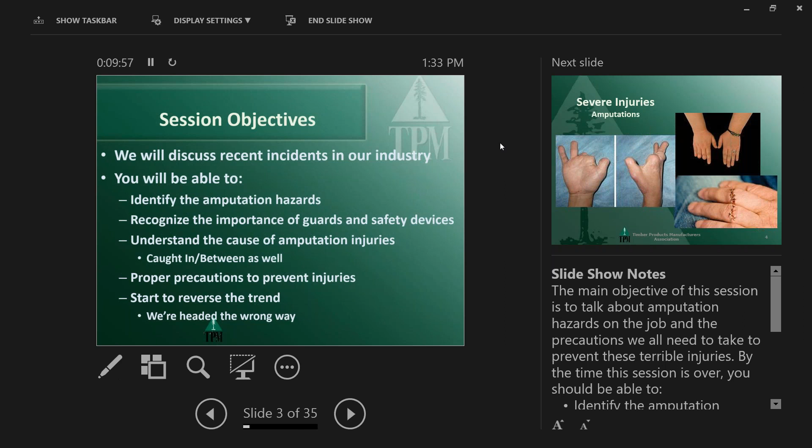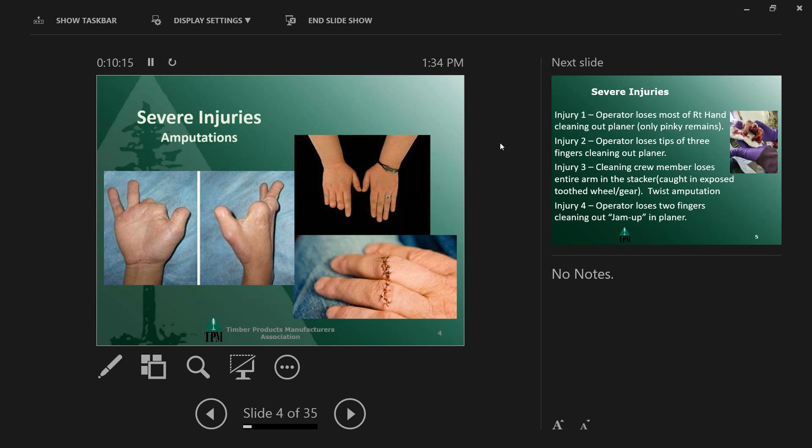We're still seeing quite a few, and in fact, I'm going to have to update this presentation because there are 3 more that I have not investigated yet, so I can't give you any information on those. We're going to focus on amputations. We're not going to cover any broken bones, even though those are serious injuries. We're going to focus on the actual amputations or incidents that have caused basically permanent disability.

The number one, that was the first one we had, a couple of years ago now: they were reaching into a planer. It had been jamming up all day long, or crashed as they called it, and they would leave the planer running. This is kind of a theme with all my planers. They were supposed to clean out the jam with a little piece of lath or a sticker. He got everything cleaned out, saw a little chunk of wood sitting up on the top head of the planer, and reached in to grab it. He'd done it many times, and they ran their planer with the heads unguarded so they could sharpen them while running, which is pretty common.

But just imagine a barrel with a few thousand razor blades on it. It's planing the wood down to the exact dimensions they want, and that thing pulled his right hand in, and the only thing he has left is his pinky. That's it. His hand is just slightly wider than his pinky. Over something that wouldn't have mattered if he'd left it there or not. And that tends to be a theme through all of these. We had another operator lose tips of 3 fingers cleaning out a planer. Another jam up.

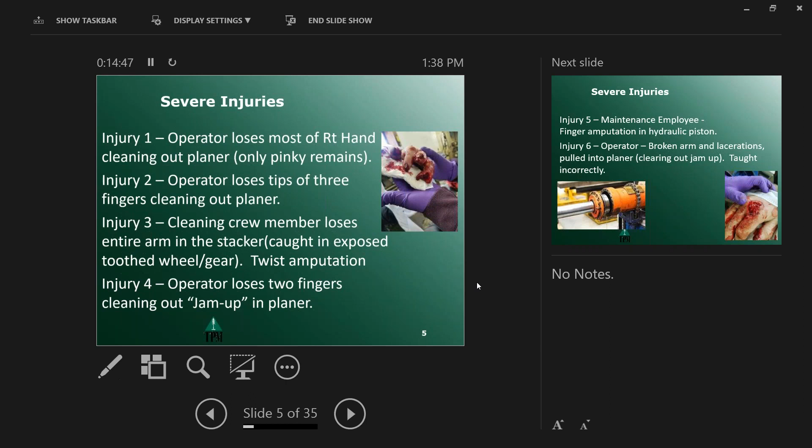Maintenance employee, and they were doing something that I'm a big supporter of: he fixed a machine and he was standing there watching it operate to make sure what he had done had worked. And as he was standing there, he leaned against another machine and the hydraulic ram cycled and it crushed the tip of his finger and took it off.

And then number 6, the employee didn't know the appropriate way to clean out jam ups with this planer, because they had literally taught him to stick his arm in and swipe it out. And they felt that you couldn't get in far enough based upon their measurements. Basically, they had a lot of people who were under 6 foot and you could reach in without hitting the knives. They got an employee over 6 foot. When he reached in, it caught his arm and pulled his arm into the planer. And he ended up losing the tips of multiple fingers and it broke his arm in multiple places.

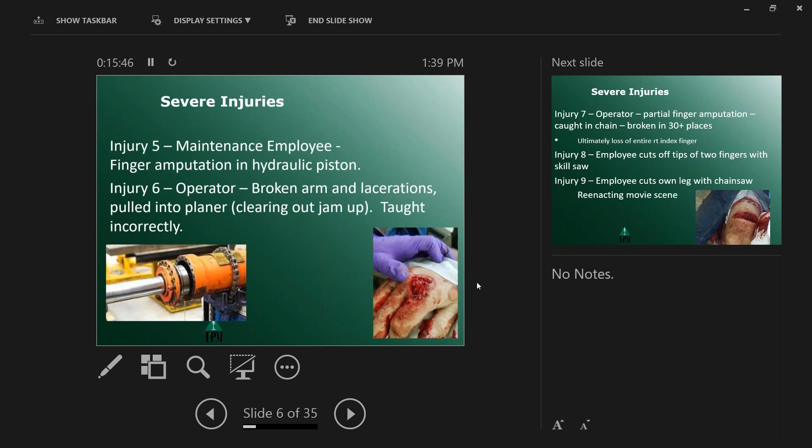Number 7, this one ultimately, so he got his finger caught in a chain, and it broke it in over 30 places. And he refused to have it amputated, is what they wanted to do. Ultimately, the finger just was so badly damaged that a couple weeks later it got necrotic and it had to be amputated.

And then number 8 is there are actually now 4 of these, and we'll talk about 3 of them. Had a run on employees cutting the tips of their index and middle finger of their left hand, cutting those off with a skill saw. So they'll hold a piece of wood in their left hand, and they run the skill saw over it real quick, and they take their fingers as well.

And then 9, not an amputation per se, but this is what happens when employees reenact scenes from Texas Chainsaw Massacre with a chainsaw and run it across the top of his thigh while it was running full speed.

10, we had a couple incidents with molders right in a row. And both of them were pretty bad. In essence, we had unguarded side heads on these molders. And in one, as he was walking by, he tripped and stumbled and ran his hand into the molder. And it just shaved off the top of his hand and then the tips of fingers. And then another one, the employee brushed his hand against it. He was walking by it and lost 2 fingers and parts of his knuckle.

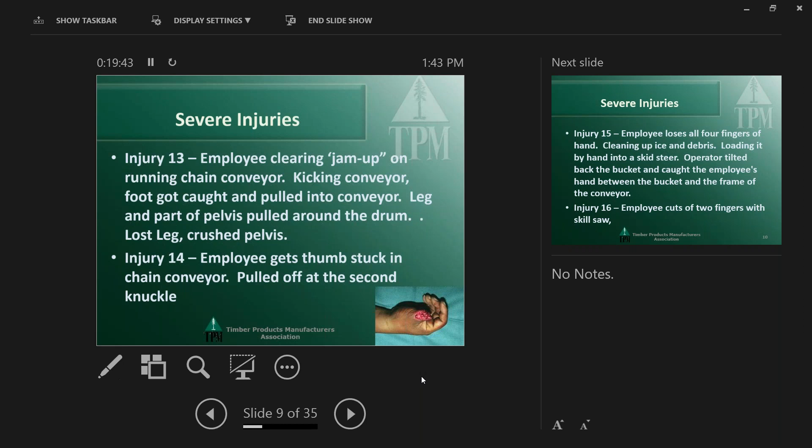We had an employee get his thumb stuck in a chain conveyor, and, for lack of a better term, it just ripped it right off at the second knuckle. We're still watching that one because they've attached some of it back on, but from seeing it just a couple days ago, it's not looking very positive.

Number 15, we had an employee, and this is one of the few, pretty much a brand new employee. Very few of these are new employees, but 2 employees were out there cleaning up chunks of ice and sawdust and bark and everything underneath the conveyor, and they were supposed to be loading it in a skid steer, but they had an attachment they were supposed to be using. They didn't want to take the time to put that attachment on, so they just had the operator driving it, and the other employee was just pushing big chunks of ice into the bucket.

And the employee was getting a particularly large chunk, and he put his hand on the bucket for leverage to try to roll this piece in as the operator tilted it back, and it took all 4 of his fingers off at the knuckle.

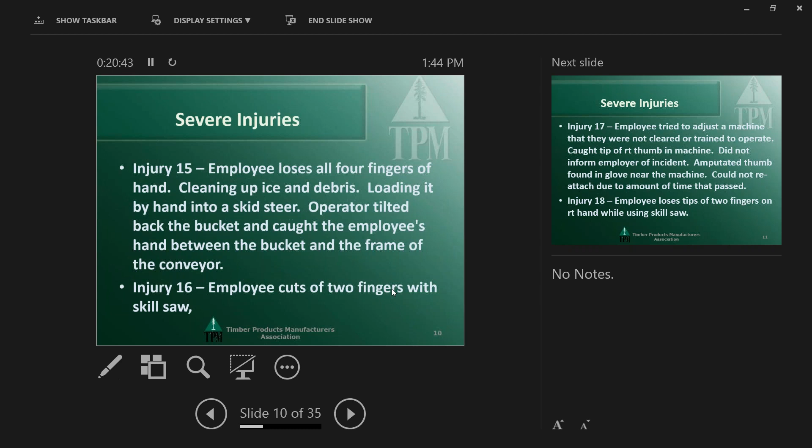Then, as I said before, we have quite a few people cutting off fingers with skill saws. Exact same scenario, holding it with their left hand or just running the saw across it real quick.

17 is, boy, there's a lot to this one. But long story short, we had an employee who was not trained or authorized, and no one had ever asked him or wanted him to operate this stacker. He decided one day to go over and try to either adjust the machine or what was in the machine. They saw him yank his hand away, and then he took off. He just left.

The supervisor went over to see what the heck was going on, found the glove on the floor with the thumb in it. But so much time passed with this in tracking down the employee, because he just left. He just took off. They couldn't reattach that thumb.

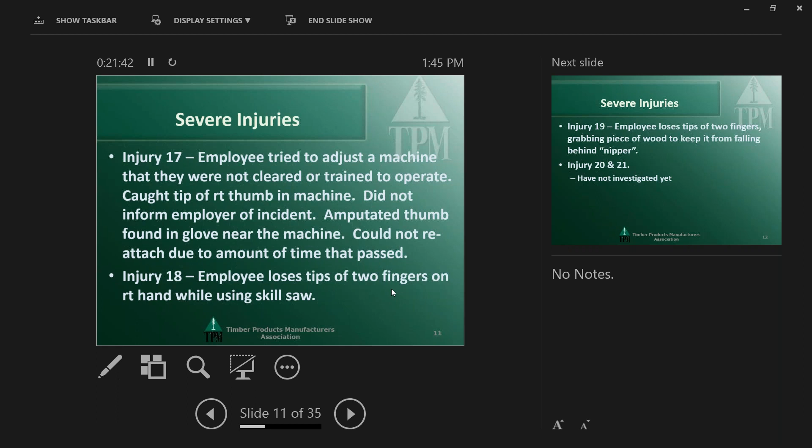And then there's a fourth one. This is the third, but there's a fourth one of another person cutting their fingers up with a skill saw. And there's one more that I've not had a chance to investigate yet.

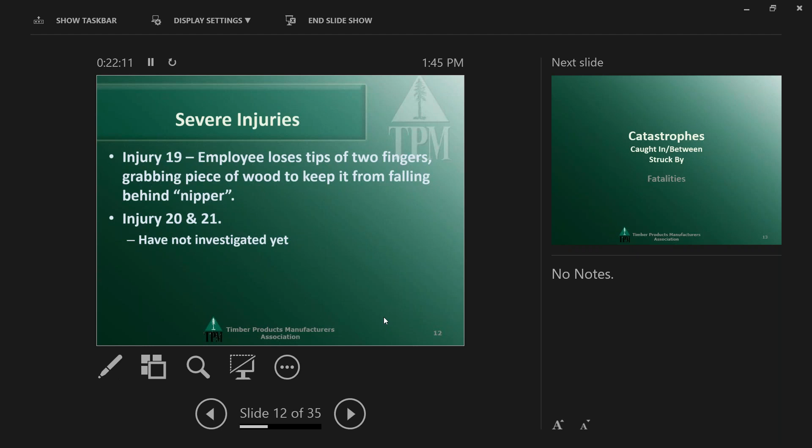And then 19, we had an employee try to grab a piece of wood that had fallen behind what they called the nipper, and it just clipped off the ends of like a shingle, and a piece of wood started to fall behind. He reached to get it, and at the same time triggered the nipper, and it took his fingers off. And so I actually have 2 more that I can't give any information on because I just haven't had a chance to investigate them.

So along that same note, unfortunately, we've had a high number of fatalities over the last couple of years. We had a millwright who was working on a pickup that he had hoisted up in the air by attaching it to the brush guard. He was changing out leaf springs. He got the first set of leaf springs done, and when he was working on the second, he was in between the tire of the truck and the frame when that brush guard broke off and crushed him in between the body of the vehicle and the tire.

And then the picture in the bottom, I guess it's in the middle, that orange and green machine, that is actually the machine. There's an employee working by the end of the stacker, and a board broke, so he went to go get the pieces out, and he waved the operator off. He got the first piece out. She thought he was done, started the machine back up, and as he's grabbing the second piece, his head got crushed in between that orange trolley and the big green frame there in the picture.

This is the day after the incident when we're fabricating a guard to keep this from ever happening again. But yeah, this is a day after our guy died.

We had a machine operator who was crushed by product while he was clearing out a jam up. There's a jam up in the sorter, right around lunchtime. So they basically just paused the line. He went to lunch, came back, and as he was coming up to that sorter, that waterfall, he started flipping boards and clearing it out. And the machine was still in auto mode. And as soon as the eye got clear, the conveyor did what it was supposed to and started loading wood. And he was crushed by product coming down the line.

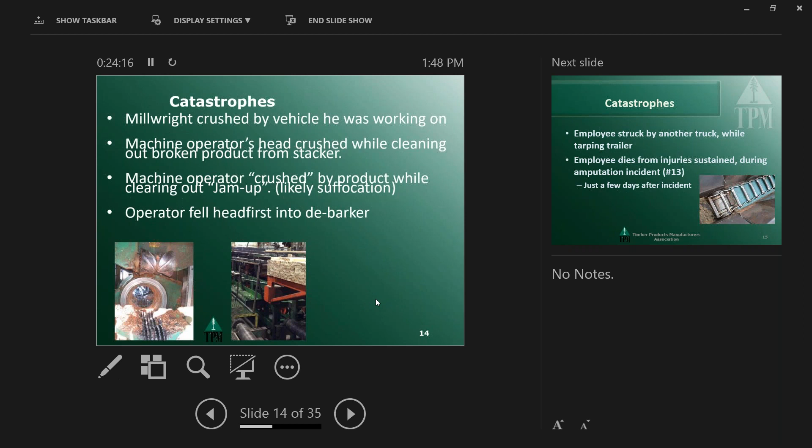And with number 4, I really don't have much information, as it's almost impossible to get it at this point. We had an operator fall headfirst into a debarker. We had an employee struck by another truck while he was tarping a trailer. He either jumped or fell off directly into the path of another truck. And then my employee that lost his leg up into his pelvis ended up dying a couple days later after he'd been pulled around that drum on that chain conveyor.

So there have been other fatalities, but not related to caught in between or lockout, tag out, or amputation prevention, but all of these directly related to that. So I wanted to look at this and start to put things together and try to figure out what in the heck is going on? How do we prevent this?

And the first thing that surprised me is very, very, very few of these are new or newish employees. On average, there's more than 10 years of experience. These are our veteran people that this is happening to, with just a couple exceptions. I'm also concerned about the disproportionate amount of injuries and severe incidents involving planers.

It seems to be, I guess, an industry standard or something where we leave the planer on when we're clearing out jam ups. That worries me. But what really struck me, and it started with my millwright, is that he said he'd actually done it 1,000 times. So I went back and talked to my folks with the amputation, and all of them said in one form or another that exact same thing. I've done it that way 1,000 times.

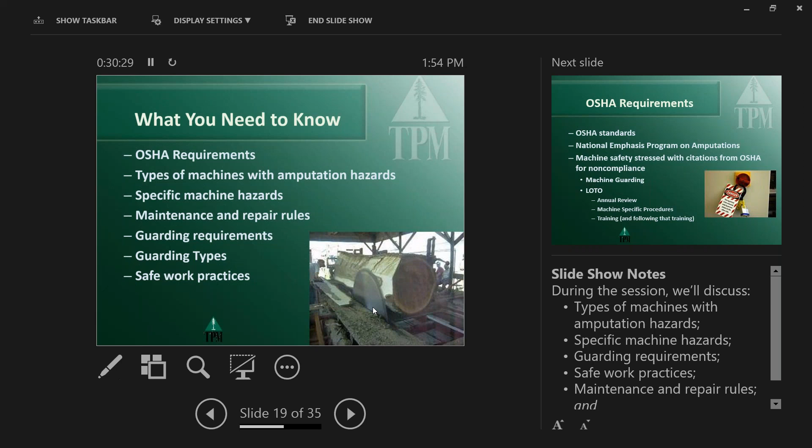And then with the guarding, there's a misconception that it can only be expanded metal guarding, but there are a lot of different options there. We're just trying to keep the employee from coming in contact with the dangerous bits, and it doesn't mean we have to build a metal box around it. And then with all of this, there's going to be safe work practices, and just sticking a stick in the planer to clean out the chunks is not a safe enough work practice.

So, the OSHA standards, we all have those requirements, but I'll tell you, in addition to the lockout tagout and the machine guarding requirements, if you have an amputation, you have the bad thing happen, I guarantee you'll have a visit from either federal or state OSHA, depending on where you're located. It's not a maybe, it's a when. Most of the time it's within 48 hours of the incident.

And they are going to go through you to the nth degree on machine guarding, your program and what's on the machines, and your lockout tagout program. They may go through other things as well, but they're going to go through those with a fine-tooth comb. And if you had an amputation, honestly, who really brought them there? We asked them to come in.

So they're going to look at your training. They're going to look at your machine-specific procedures. Every machine has to have its own procedures. And then they're going to look at, do you conduct your annual review and make sure everybody's still doing it? And you have to do all those things on top of your policy, on top of everything else. You've got to go through and actually make sure people are doing it.

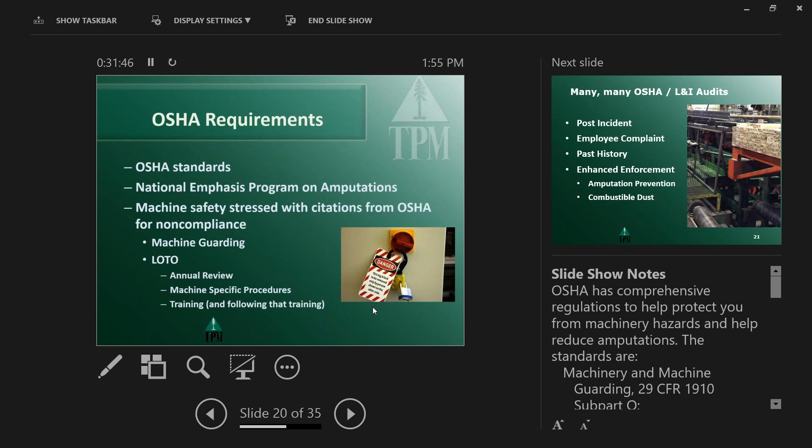And there have been many OSHA and labor and industry audits. The vast majority have been from post-incident. We had an amputation, we had a fatality, we had somebody get hospitalized. There have been a few that have been from employee complaint. And if you get an OSHA visit from an employee complaint, do not waste one millisecond of your time trying to figure out who did it. It doesn't do you any good, and in fact, could get you in even more trouble.

And here's the problem: you have the bad thing happen, be prepared to get other visits every year for the next 3 to 5 years. And then on top of that, there is enhanced enforcement right now on the amputation prevention initiative. So they're trying to prevent those, which needs to be done. And the combustible dust enhanced enforcement is still in play. So it's very, very likely that you're eventually going to have them walk through and take a look at what you've got going on.

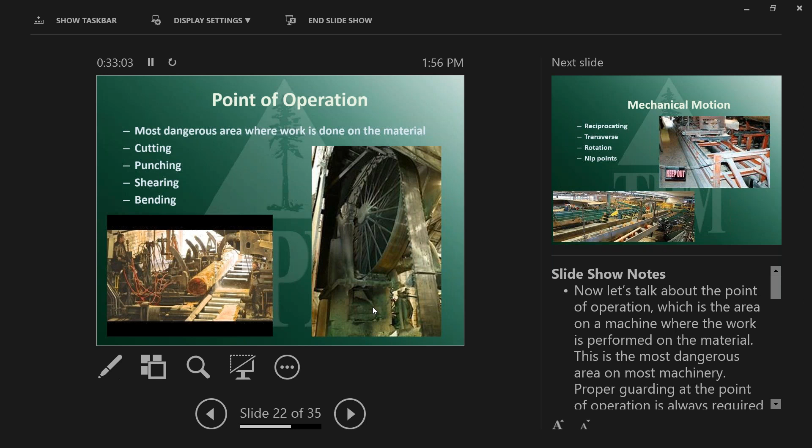So we're pretty good at understanding we've got to protect at the point of operation, where it cuts or the hole drills through or where we're shearing something. We do a pretty good job, in essence, protecting the saw blades. What we don't do the best job on protecting is the conveyors or the mechanisms driving or feeding it. So, like the stacker trolley or carriages or things like that, or we don't look at the belts or the chains that are driving it.

So a lot of times we'll protect the saw blade, if you will, but then we don't protect what's driving it or what's feeding it. So you've got to look at the entire process, and it's not just the point where the work's being done. It's really anything that one of our employees could get caught in or between or under.

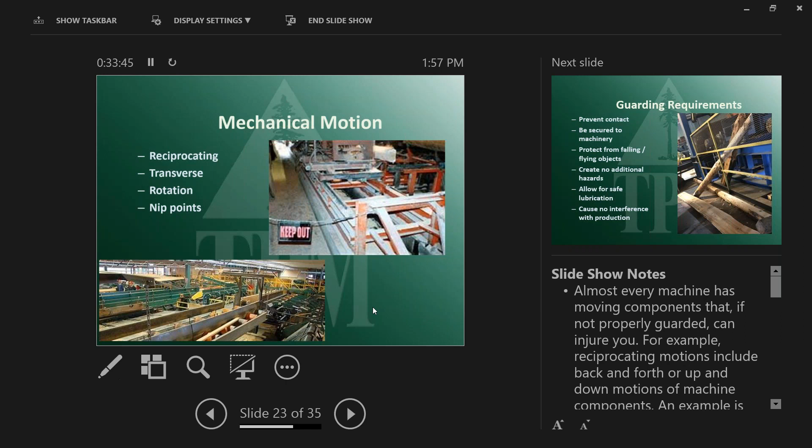So the guarding requirements, and this is coming from the standard, right? The guarding requirements have to prevent contact either between employees and the machines or employees and the product. So we've got to prevent contact. It has to be secured to the machinery. It has to protect employees from falling or flying objects and can create no new additional hazards.

Now it has to allow for safe lubrication and maintenance, and it can't cause interference with production. And that's been the sticking point. That's been some of the argument from companies on this machine guarding. But with this picture, and I see this relatively often, we've got a guard in there, and it's only kind of half doing its job. And so, we've got one in place, but it's not doing exactly what we need it to do, or we have some other issues.

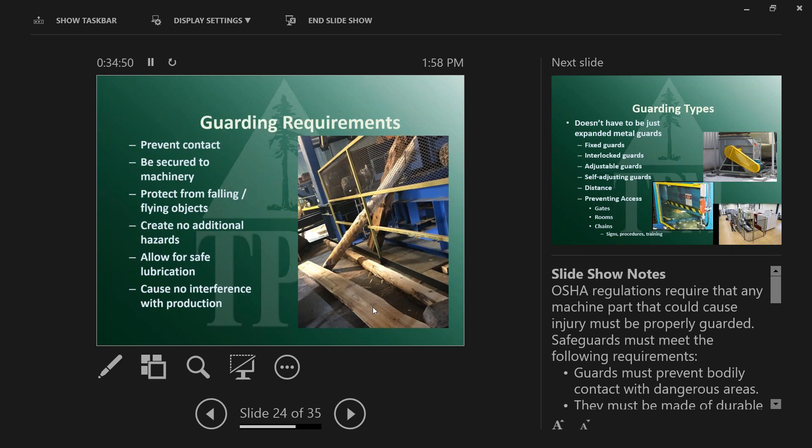And I see that quite a bit. But the guards don't have to just be expanded metal. They really don't. You can have fixed guards, absolutely. You can have interlocked: you take one off and it shuts down whole sections of machine. You can have adjustable ones. You can have ones that are self-adjusting, that you feed a piece of product in and it closes down over it as the product goes through.

But just remember, distance in and of itself is a guard. You can guard by distance. And you'll see that a lot where we try to prevent access. We'll put things in rooms, but putting up chains or railings or gates or bars, that's acceptable. Once again, we just have to prevent the employee from getting in contact with a running machine. And the guards are just part of it, but it's only a part of it.

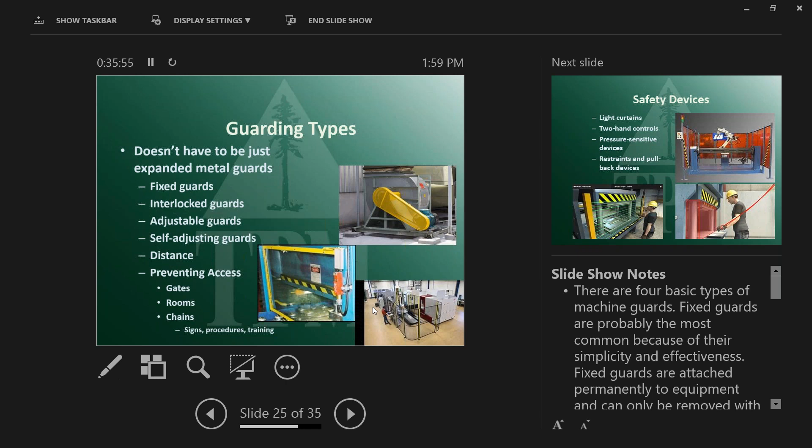Procedurally, we have to be sure that we've got the right way of doing it in place and that people are following it. So it's going to be all of this plus signs and procedures and training and just awareness. And once again, it doesn't have to be those metal guards. It can be light curtains. You can have somebody guarded by distance because it's a two-hand control, and if they leave both those controls, the machine shuts down.

That is guarding. You can have pressure sensitive devices: basically if you walk in and any weight goes on this pad, it shuts everything down. I see that occasionally around palletizing robots, and if anybody crosses the threshold, it just stops. So those robots, unfortunately, can be deadly because they're just there to do their job. They don't care if somebody's in the way or not.

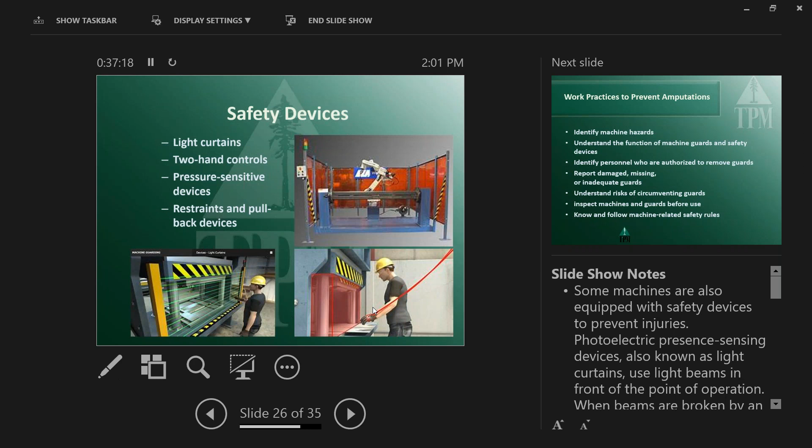And this is relatively common, guarding can be that we just have somebody restrained in place. They're on a body positioning system and they literally cannot get close enough. If you do those, you've got to really be conscientious about how it's maintained and how it's followed, and that it fits everybody. I see that at a number of my mills where the person is positioned in place and they can't fall, and that's fine. Just make sure that is in good condition, because if that fails, you're going to lose an employee.

So just go through your best work practices. How do we prevent this? Go through, look at your machines, identify where you've got hazards, and understand the function of those guards and those safety devices. Why are they there? What are they preventing? My recommendation would be that you have a small group of personnel who are authorized to even remove those, your maintenance guys or your millwrights, your mechanics, but everybody knows that they need to report damaged, missing or inadequate guards.

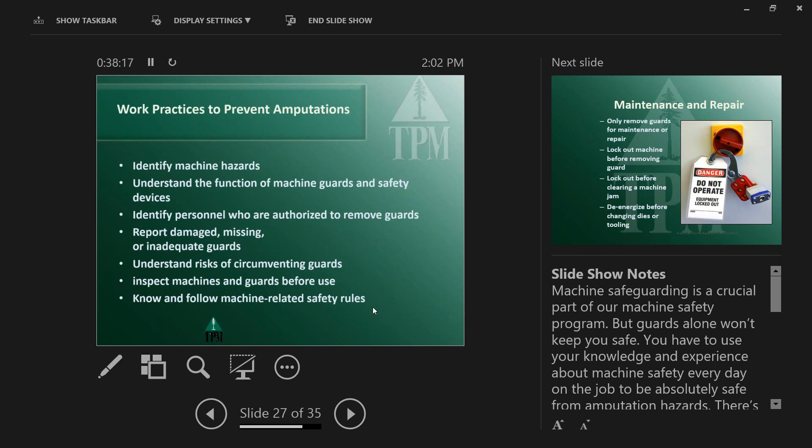Train your people and your managers on the risks of circumventing those guards, and then have operators inspecting those machines before they use it. Because an employee can't follow a safety rule if they've never been trained on it. And with a couple of these, that has been part of the issue: they had no idea how to do it the right way.

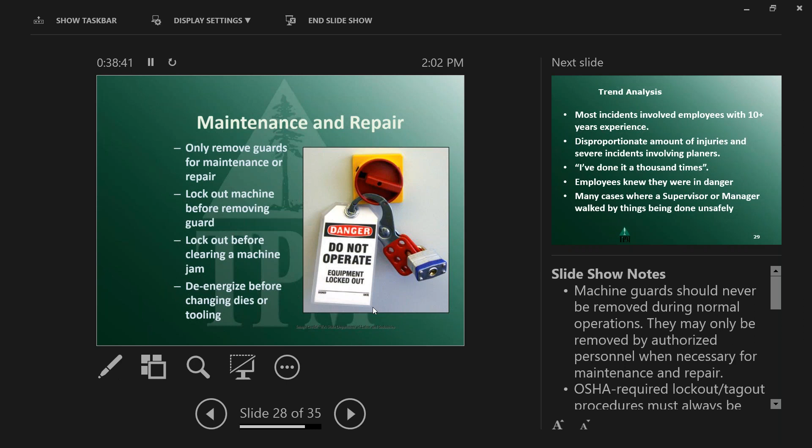And this is pretty standard stuff, but you should only be removing guards for maintenance or repair. The minute you decide one of those guards has to come off, the thing should be locked out before you remove it. I'm a big believer that we need to lock out machines when we're cleaning out jam ups, and de-energize it before you're changing your dies or tools. This is pretty basic maintenance lock and tag out.

And so I want to go back again to this trend analysis, because this, I think, tells us a lot. It's our veteran employees that this is happening to, by and large, with very few exceptions. It's our veterans. And I hear complacency kills, and it does. But a lot of what you see is non-routine tasks, something they only do once in a great while, and then they're really in danger.

With the planers, hopefully they're not jamming up more than they're regularly running. They get into the zone and they're feeding that planer. And so when the jam up happens, now we've got a non-routine task, and that's when people are in danger. But not all, but most of them have done it wrong many times, and they knew they were in danger.

And it's unacceptable to have a supervisor or a manager or a lead walk by and see somebody with their head or arm or hand in the machine, and they know it shouldn't be there, and they don't say anything. And I would challenge everybody, whether you're a supervisor or lead or a manager or not, if you see a coworker doing that, remind them of how we do it.

With almost all of these, they had lockout, tagout policies and procedures, and the people knew them, had been trained on them, and chose not to follow it because it was quicker. But this is coming from a place of, these are people who are wanting to be successful, that are wanting us to be successful. And we can use that.